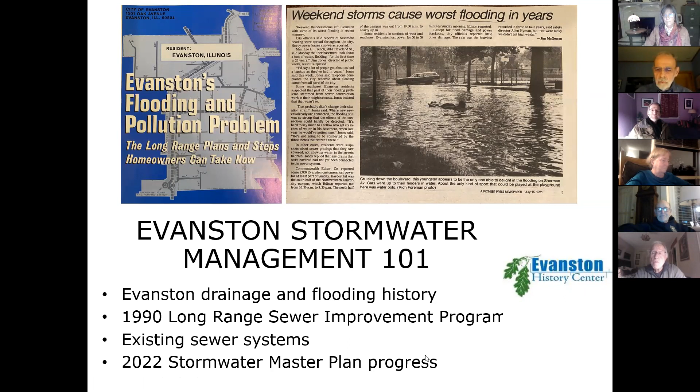In addition to Lake Michigan, Evanston has one other major water feature. The North Shore Channel borders the southern part of the city and courses through the northern part, reaching the lake in Wilmette. Water normally flows south away from the lake.

Evanston's topography may appear to be flat, but there are subtle topographical features. Throughout the eastern part of Evanston, Chicago Avenue and Sheridan Road, shown in red on the right, and Ridge Avenue to its left, are slightly elevated above the adjoining land. These routes follow ancient beach ridges formed when the lake surface was at a higher elevation.

The beach ridges are the Graceland Spit on the right and the Rose Hill Spit on the left. The Rose Hill Spit is considerably wider in South Evanston. These two beach ridges were formed by the littoral drift of sand during periods of higher water level.

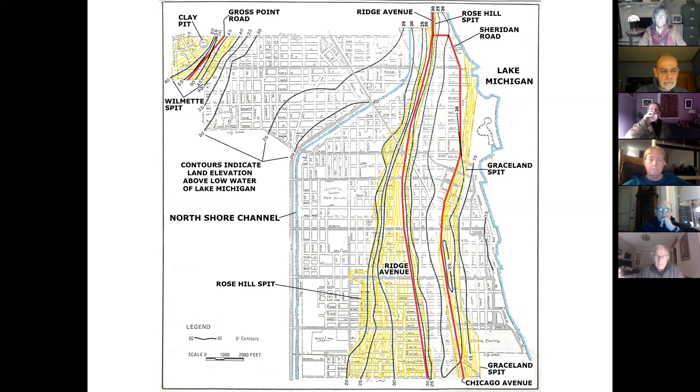Evanston's first residents settled along the beach ridges. Sewers were installed primarily to carry away domestic sewage and accommodate some land drainage. These early combined sewers were constructed using vitrified clay tile for smaller sizes and brick for larger sizes. Before the North Shore Channel was built, the sewers discharged to Lake Michigan.

In 1889, Evanston had an area of 4.5 square miles and a population of about 9,000. In that year, the Sanitary District of Chicago was created, but Evanston opted not to be included in the district. In 1902, Evanston's Commissioner of Public Works declared the combined sewer system to be inadequate in size and depth to serve the demands of the city. By 1903, Evanston had annexed South Evanston and its population had tripled. Another opportunity to be included in the sanitary district was not refused.

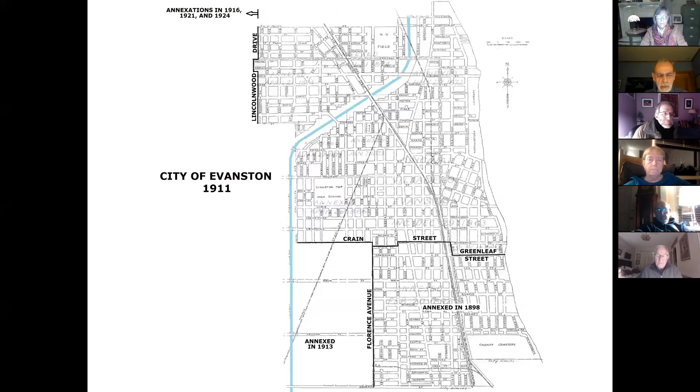8 years later, in 1911, the sanitary district, presently known as the Metropolitan Water Reclamation District of Greater Chicago, completed construction of the North Shore Channel and placed it in service. Evanston now had the opportunity to redirect the flow of its sewers to the channel and away from the lake. In 1916, Evanston began construction of sewers discharging to the channel for new developing areas in the southwest part of the city. Some sewers in North Evanston were already redirected to the channel as part of the channel construction.

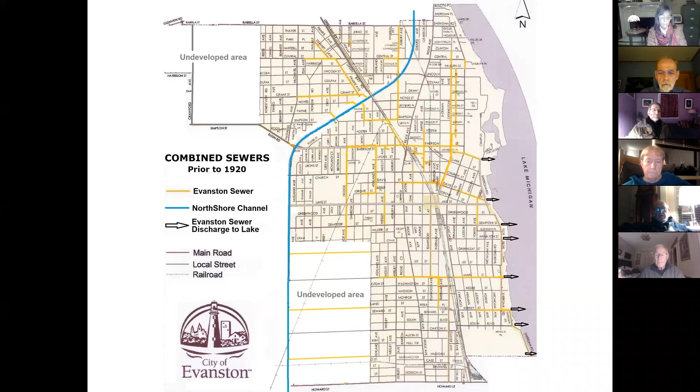However, Evanston could not afford to redirect the flow in 8 sewers discharging to the lake from Clark Street to the south city limit. These sewers were far from the channel, and the land east of Chicago was too low for sewers to flow by gravity to the channel. Also in 1916, the Water Reclamation District began construction of the Evanston intercepting sewers, a system of large sewers that relieves city sewers along the south lakefront and the southeast side of Ridge Avenue.

Relieving the sewers led to the construction of numerous multifamily residential buildings. The groundbreaking celebration for the intercepting sewer under Custer Street took place near Custer and Mulford Streets on August 23, 1916. The Water Reclamation District built an intercepting sewer along the lakefront to capture sewage discharging to the lake. The two lakefront intercepting sewers met at Lake Street, and another sewer in Lake Street conveyed sewage and stormwater west to the Evanston pumping station at Elmwood and Lake Streets. From the pumping station, the Lake Street outfall sewer conveyed sewage and stormwater to the North Shore Channel.

The Water Reclamation District also built other intercepting sewers in Evanston to drain the area between Chicago and Ridge Avenues. An intercepting sewer begins at Howard Street and flows north under Custer and Elmwood Streets to the Lake Street outfall sewer. To drain the downtown area, another sewer was built starting at Emerson Street, flowing south under Orrington to the Lake Street outfall sewer. Last, the Emerson Street outfall sewer was constructed from Ashland Avenue to the channel to relieve more local sewers.

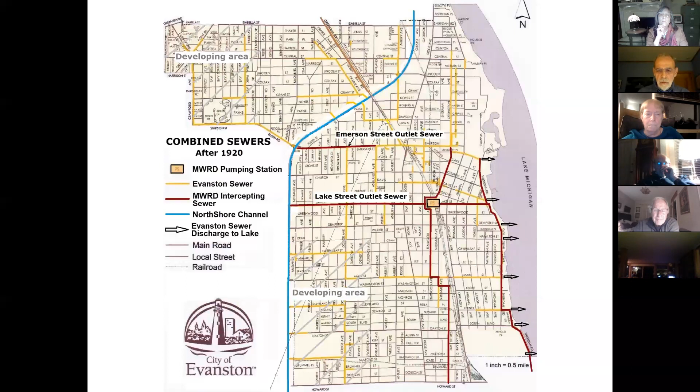The pumping station at Elmwood and Lake was necessary because sewage and stormwater from the low lakefront area needed to be lifted so it could flow to the North Shore Channel by gravity in the Lake Street outfall sewer. Between 1911 and 1928, sewage was discharged to the channel without treatment, but it was diluted in the channel by pumping lake water into the channel at Wilmette.

Most of the length of the Lake Street outfall sewer was constructed by the open cut method. Looking east from Pittner Avenue on September 19, 1917, the sewer is being built in the trench. The excavated trench is lined with timber piling for safety to prevent a trench cave-in. The piling will be removed as the trench is backfilled.

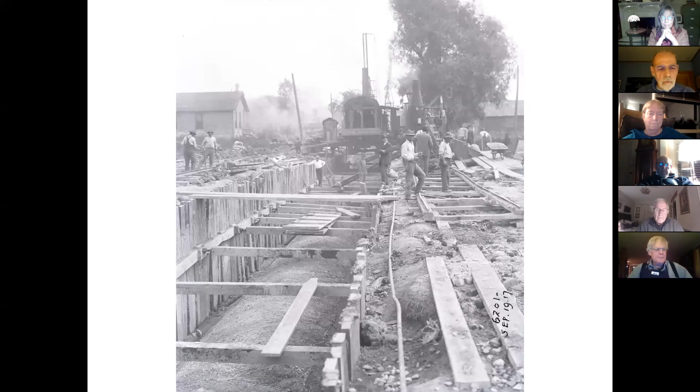Looking east on September 19th, 1917, along Emerson Street toward Dodge Avenue, the Emerson Street outfall sewer is also being constructed by the open cut method. Both the Emerson and Lake Street outfall sewers originally discharged to the channel.

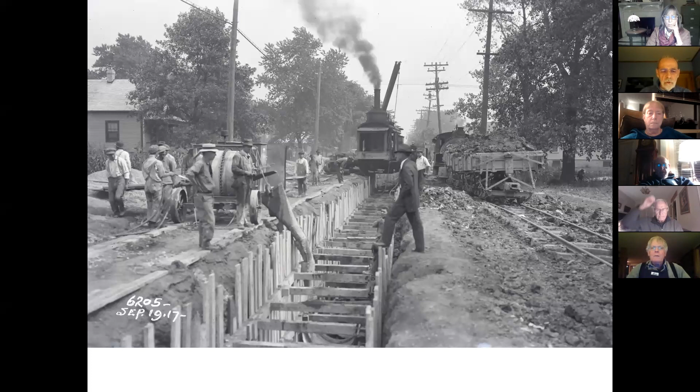In 1928, the Emerson and Lake Street outfall sewers, as well as many other Evanston sewers, were connected to the Water Reclamation District's north side intercepting sewer number 1 that flows south along the west side of the North Shore Channel to the O'Brien Water Reclamation Plant at Howard Street. After this time, dry weather sewage no longer flowed into the channel. During wet weather, excess combined sewage and stormwater would overflow to the channel. The Green Bay Road intercepting sewer was constructed in 1950 to serve North Evanston and suburbs farther north.

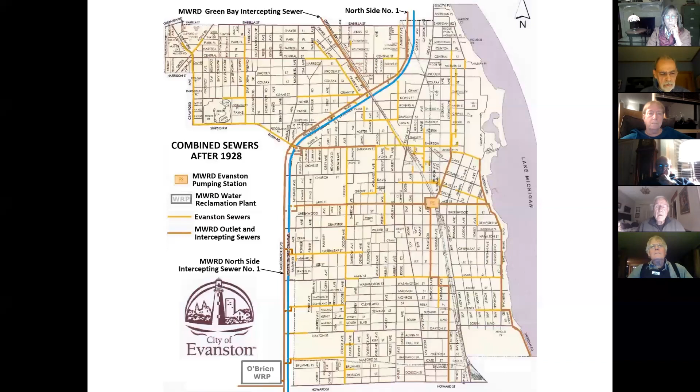The north side intercepting sewer number 1 was built in clay by the tunnel method and is about 40 feet deep to receive sewage from higher level local sewers. On August 30th, 1922, construction has been completed except for the removal of construction materials. The intercepting sewer could not be placed in service until October 1928, when the O'Brien plant was placed in service.

The Evanston combined sewer system was constructed as the city developed, mostly from 1880 to 1930. Much of the system has been in the ground over 100 years. Typical of combined sewer systems built at the time, the sewer conveyed sewage as well as stormwater during wet weather. Over 60% of the 144 miles of Evanston combined sewers are 12 inches in diameter or smaller pipes. While this size is adequate for dry weather sewage, it is not sufficient for wet weather drainage. Sewage and stormwater backup into basements occurred frequently in Evanston during intense storms. Several studies through 1980 demonstrated the high cost of remediation, but due to high cost, no action was taken.

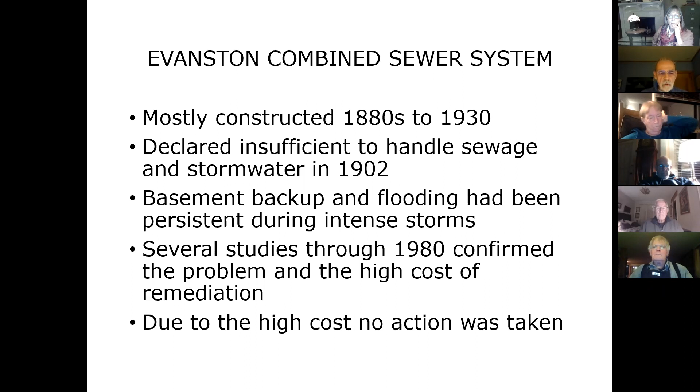Combined sewers are located under every street in Evanston and convey sewage in dry weather to the Water Reclamation District intercepting sewers and the treatment plant. The construction of combined sewers was prevalent prior to 1950. Since then, combined sewer construction is prohibited. The combined sewer is owned, operated and maintained by the city. Lateral sewers convey sewage to the combined sewer from homes and businesses. The lateral sewer is the responsibility of the property owner.

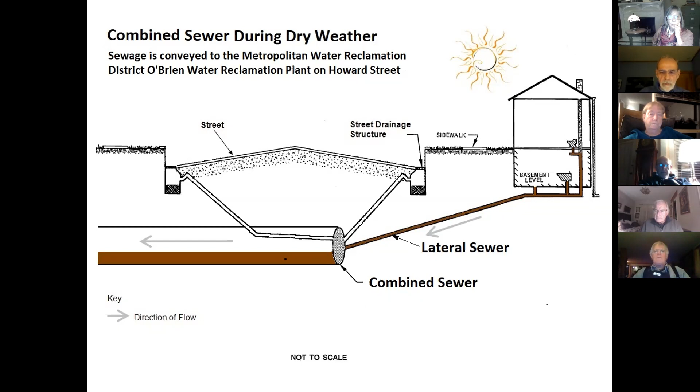Combined sewers also convey stormwater. Prior to recent sewer improvements, during intense rain events, the combined sewer often became surcharged, that is, completely full and flowing under pressure. With limited combined sewer capacity, excess combined sewage and stormwater would back up into basements and onto streets. Excess flow would also overflow to the North Shore Channel, hence the term combined sewer overflow.

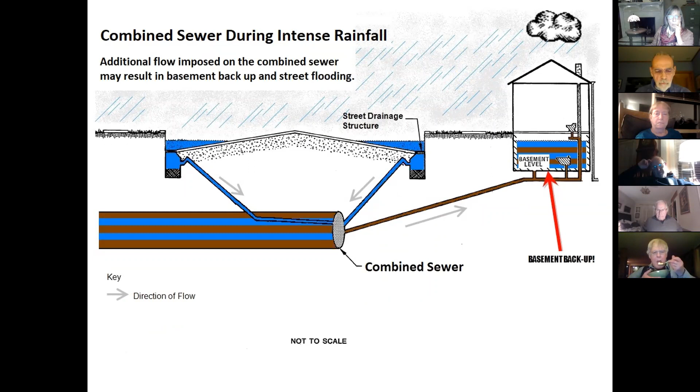Flooding increased over time due to more impervious surfaces, such as alleys, parking lots, sidewalks, streets, as well as more buildings and fewer open spaces. Impervious land surfaces prevent the infiltration of rainfall and hasten and increase the amount of rainfall runoff.

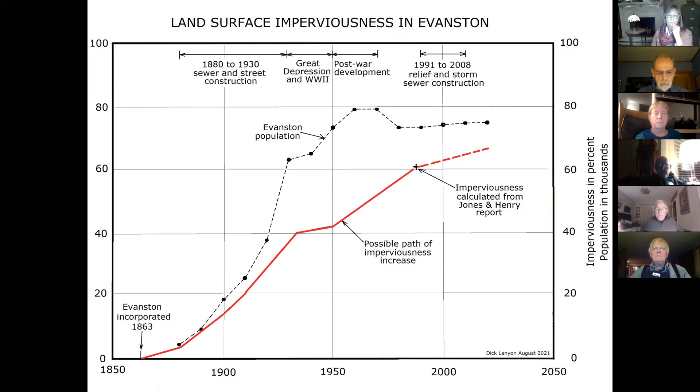Two news articles describe two storms in July 1981 and August 1987 that caused extensive flood damage. The third article explains the frustration of Evanston elected officials upon learning that federal funding for flood control was not likely. To address persistent flooding, the Evanston Flood and Pollution Control Commission was created in 1975 and was composed of citizens and members of the city council.

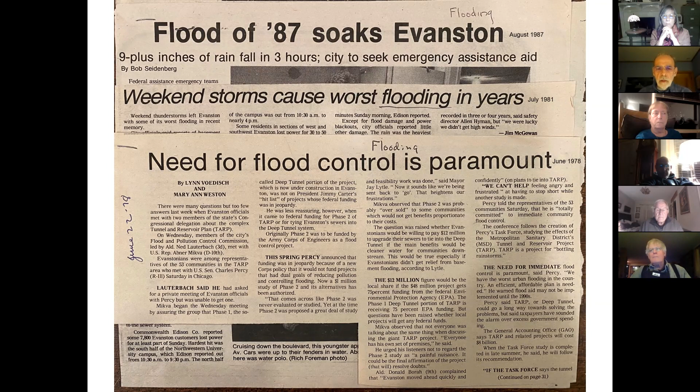During the 1980s, the commission oversaw the preparation of a flood control plan. A hydrologic and hydraulic model of the combined sewer system identified many locations where combined sewers needed relief to reduce local flooding. Meanwhile, underway since 1975, the Water Reclamation District was constructing the deep tunnel, and it was known that the deep tunnel would provide an outlet for Evanston's stormwater. Located in rock 200 feet below the North Shore Channel, the deep tunnel was placed in service in 1985.

In 1990, the Evanston City Council approved the long-range sewer improvement program. Construction began in 1991. The program included three components. First, the installation of large diameter relief sewers installed about 60 feet below ground that convey combined sewage and stormwater from the combined sewers above to the deep tunnel below.

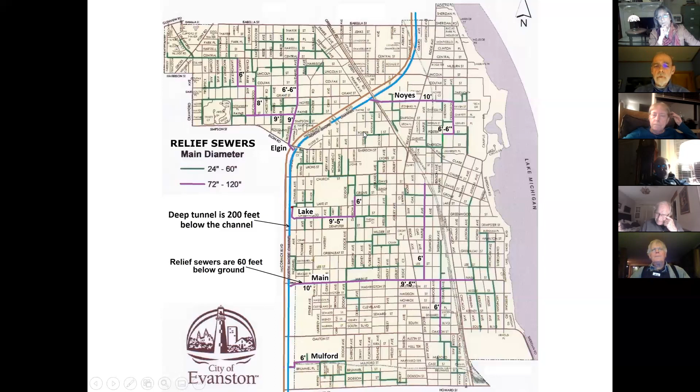The Lake Street system drains more parts of the west side, and far south, the Mulford Street sewer drains southwest Evanston. Now you'll notice some areas here that aren't served by relief sewers. I'll explain those in a moment.

The excess flow in combined sewers is discharged to relief sewers at numerous critical locations throughout the city. At each location, the two sewers are connected at a drop structure in which excess flow in the combined sewer will overflow and drop into the relief sewer. A check valve prevents the relief sewer from backing up into the combined sewer and causing basement backup.

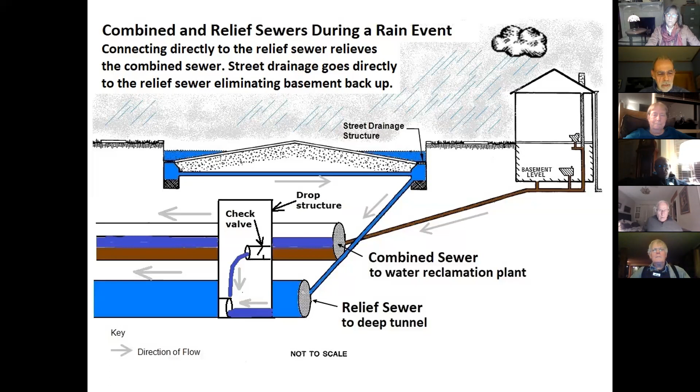Also, street stormwater connections to the combined sewer have been eliminated and replaced by direct connections to the relief sewer. This provides protection against basement backup caused by street stormwater drainage.

The second component of the plan is for flow restrictors. Restrictors are installed in combined sewers where a relief sewer is not installed. Restrictors are in street and alley stormwater structures, limiting the rate of flow into combined sewers. The limitation prevents the combined sewer from becoming overwhelmed and causing basement backup. This protection extends for all storms up to and including the 100-year storm.

Excess stormwater temporarily ponds on the street, but should not exceed the height of the curb. Stormwater forced to stay on the street can flow down the street for up to 2 blocks, where it will be intercepted by high-capacity inlets to relief sewers or storm sewers.

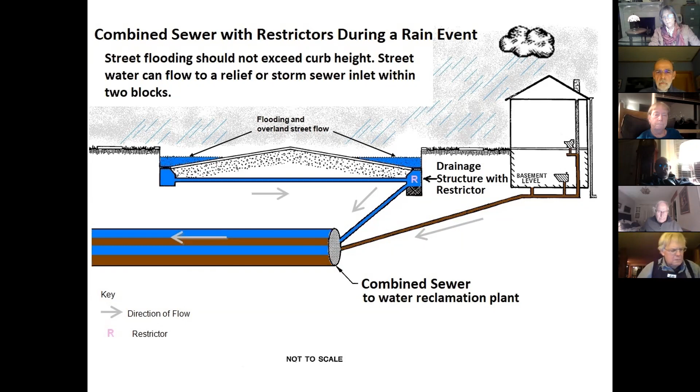The third component, separate storm sewers, were installed to convey surface stormwater directly to the channel or the lake. These sewers handle only stormwater, and the tributary areas are in proximity to the channel or lake. Where separate sewers discharge to the lake, the area is small and immediately adjacent to the lakefront. This innovative approach of combined sewers relief, street drainage restriction, and storm sewer separation was utilized because it was less costly than installing a completely new separate sewer system throughout the entire city.

Looking at this map, you see the green lines here are the storm sewers. So these are the areas that were not covered in the earlier map. These sewers drain directly to the channel and are generally smaller areas. This triangular shaped area between the channel and Green Bay Road is also served by storm sewers. Some small areas near the lakefront, like up on Roslyn Terrace, Milburn Street, discharge directly to the lake. Another system of storm sewers serves a part of southwest Evanston.

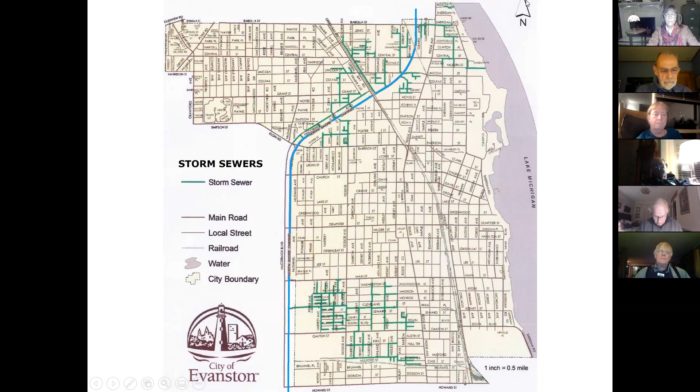The long-range sewer improvement program was constructed between 1992 and 2008 at a cost of $210 million. Evanston received the Clean Water State Revolving Fund 2006 Pisces Award for innovative use of Clean Water Act state revolving funds to improve water quality. In 2009, the city received the American Society of Civil Engineers Illinois Section Outstanding Civil Engineering Achievement of the Year Award for the Combined Sewer Relief Program.

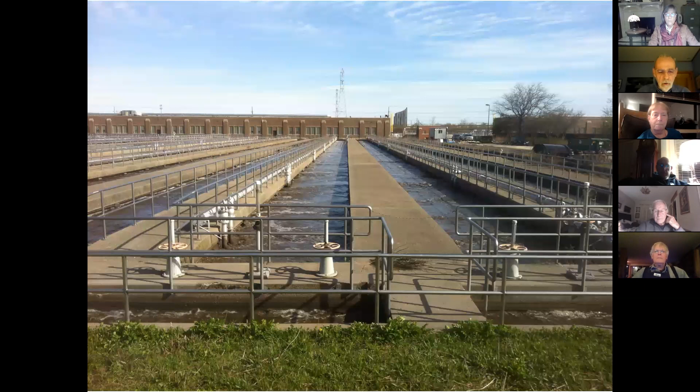Evanston does not have a sewage treatment plant. All of Evanston's sewage and some combined sewage and stormwater flows into the north side intercepting sewer number 1 and discharges to the O'Brien plant located at Howard Street in Skokie. During dry weather, sewage is treated at the O'Brien plant and reclaimed water is discharged to the North Shore Channel. During wet weather, sewage and stormwater discharges to the intercepting sewers and the plant until these facilities reach full capacity. At the same time, excess flow is being discharged to the deep tunnel from Evanston relief sewers and combined sewers.

When full capacity is reached, each Evanston combined sewer or relief sewer begins to discharge to the deep tunnel via a drop shaft. 12 drop shafts serve Evanston, and each is located along the North Shore Channel. The top of the drop shaft at Greenleaf Street in Harper Payne Park is slightly above ground level and identified with a Water Reclamation District sign. Each drop shaft is monitored over a secure radio network at a Water Reclamation District control center. The radio antenna is mounted on the pole positioned next to the drop shaft.

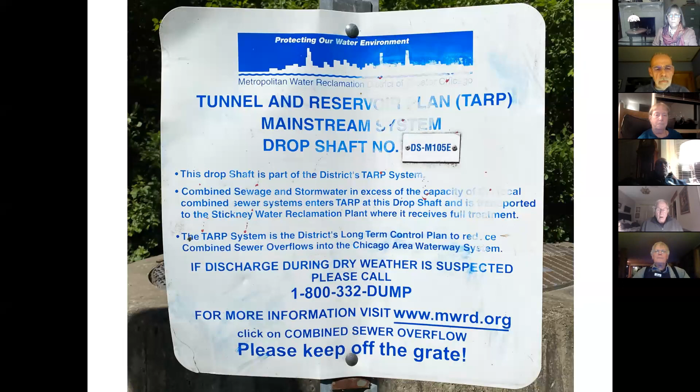The drop shaft at Greenleaf Street is identified as DS M105E. M refers to the mainstream tunnel, 105 is the number of this drop shaft, and E refers to the east side of the channel. Drop shafts serving Evanston are numbered 101 through 112. Evanston has over 20 sewers that discharge to the drop shafts. Some sewers connect directly, and other sewers connect via the north side intercepting sewer or a local connecting sewer.

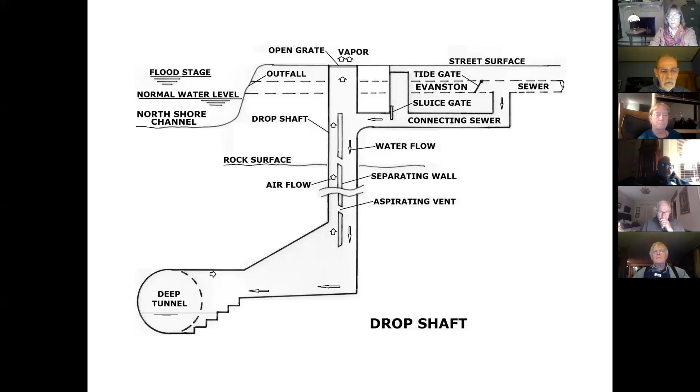Overflow from an Evanston combined sewer, shown in the upper right, flows through a connecting sewer and a control gate, and then down the vertical shaft to the deep tunnel in rock 200 feet below ground. A tide gate in the Evanston sewer prevents water in the channel from backing up into the local sewer and connecting sewers. A separating wall in the vertical shaft allows flow to drop to the tunnel in part of the shaft, while air is allowed to escape through the other part of the shaft. Vents in the separating wall allow aspiration of the dropping flow, which helps dissipate the energy at the bottom of the shaft. A relief sewer would connect with the drop shaft at a lower level, but with the same controls.

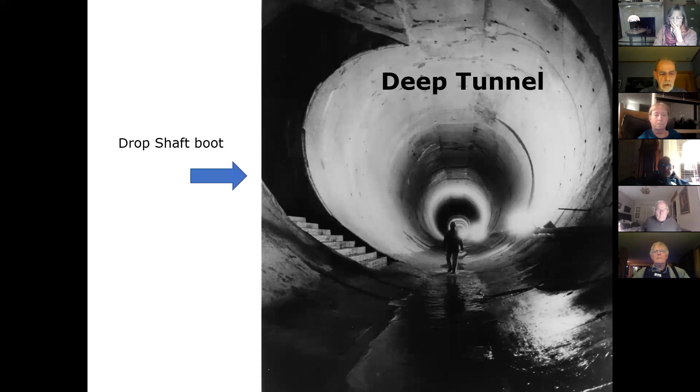The tunnel serving Evanston is 12 feet in diameter and lined with concrete to prevent exfiltration into the bedrock. During dry weather, the tunnel is empty, waiting for the next storm. Each drop shaft is to the side of the tunnel and enters the tunnel as shown. The bottom of the drop shaft is referred to as a boot.

Evanston is at the north end of the 30-mile-long mainstream tunnel. The mainstream tunnel gradually enlarges and slopes down in the downstream direction, reaching an internal diameter of 33 feet at the McCook Reservoir. The tunnel invert is much lower at the reservoir, 100 feet lower than it is under Evanston. At the south end of the tunnel, combined sewage and stormwater flows into the McCook Reservoir, where it is held until it can be pumped back to the Stickney Water Reclamation Plant for complete treatment.

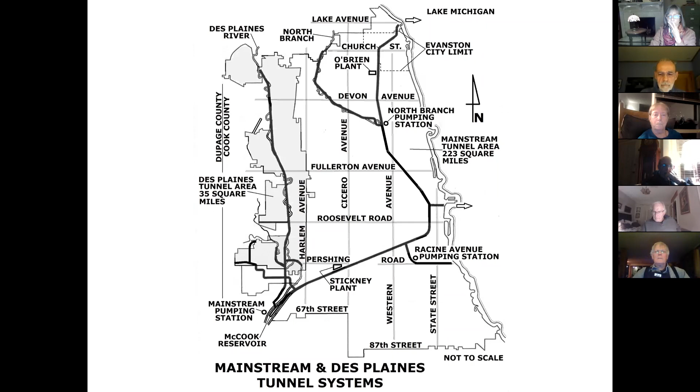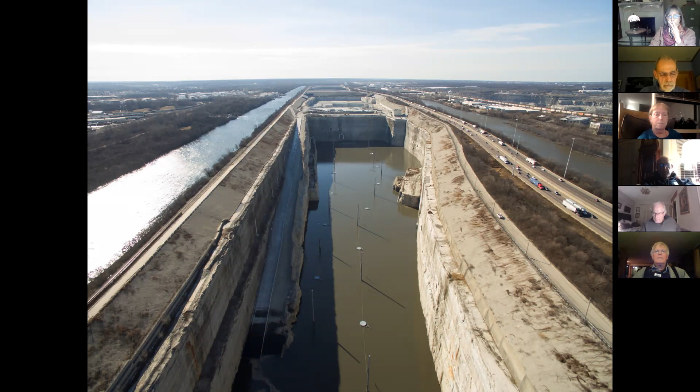The McCook Reservoir is located between the Sanitary and Ship Canal, shown at left, and Interstate Route 55, shown at right. Currently, the reservoir has a capacity of 3.5 billion gallons and can accommodate the excess flow from most storms. By 2029, construction of the expanded reservoir, shown in the background, should be complete. The complete reservoir will have a capacity of 10 billion gallons and will be capable of accommodating all storms, except the occasional very large storm.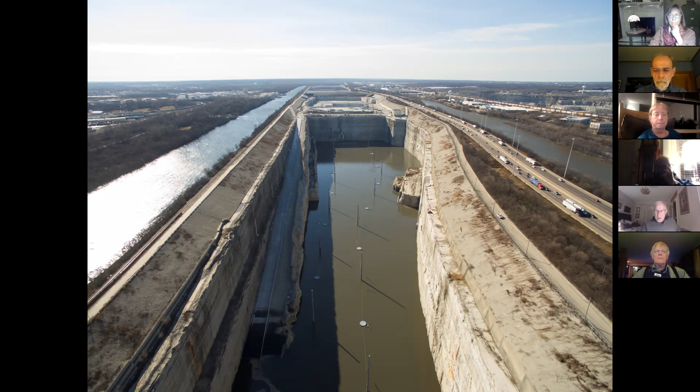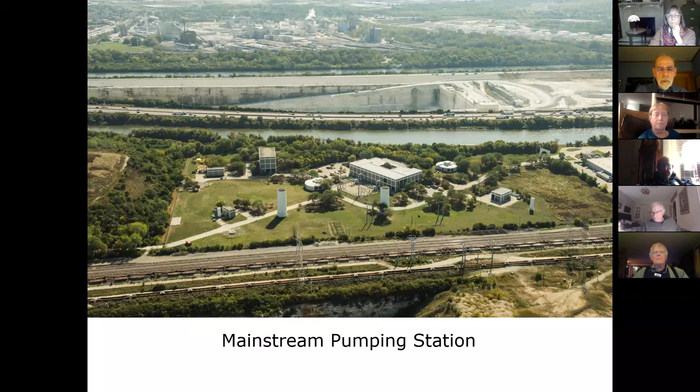The mainstream pumping station is located west of the McCook Reservoir, shown in the background. There are two large pump rooms, 350 feet below ground at this location, to pump the combined stormwater and sewage from the reservoir through a 5-mile-long tunnel to the Stickney Water Reclamation Plant. The reclaimed water is discharged to the Sanitary and Ship Canal and continues southwesterly to the Des Plaines and Illinois rivers.

Despite the benefit of reduced basement backup and flooding in Evanston resulting from the implementation of the long-range sewer improvement program and deep tunnel, a major storm in April of 2013 resulted in widespread basement backup and flooding. The direction and intensity of the storm from southwest to northeast filled the deep tunnel by the time the storm passed over Evanston. The North Shore Channel had already risen by then, and Evanston sewer outlets were restricted. McCook Reservoir had not yet been placed in service. With the reservoir in service, a similar storm today would not result in such widespread flooding.

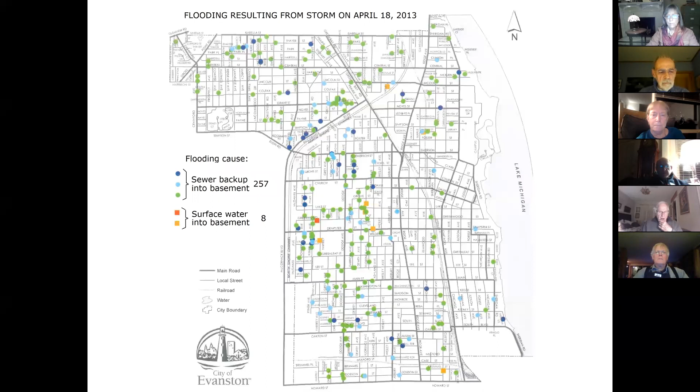Evanston's November 2018 Climate Action and Resilience Plan included the need for a new stormwater management plan to address predictions that global warming would cause more intense storms. The Evanston Stormwater Master Plan study began in April 2020 and will conclude in April 2022. Also known as the H&H study, a hydrologic and hydraulic modeling of the combined sewer and relief storm sewer basins will be completed based on 2018 land cover data and imperviousness.